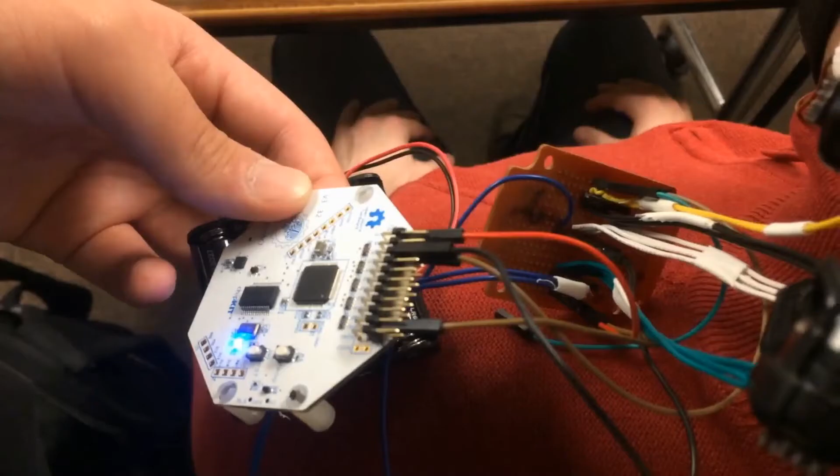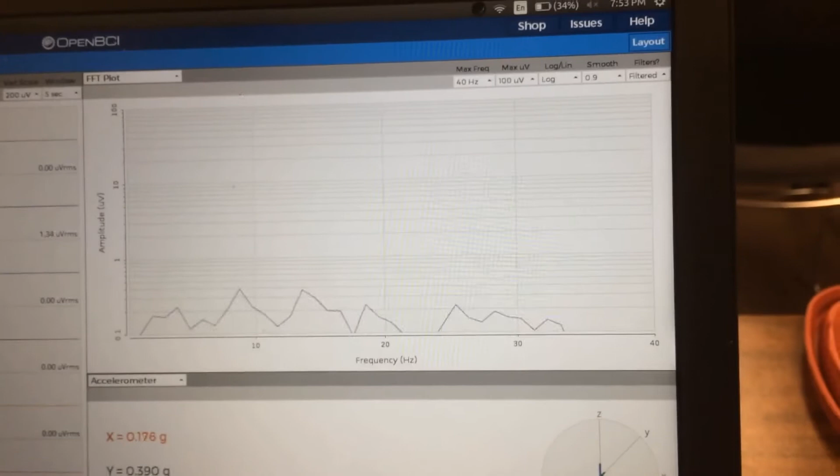Okay, what does this person want to do? And then taking that and then actually making it do that thing. Three, 2, 1, close your eyes. 3, 2, 1, open.

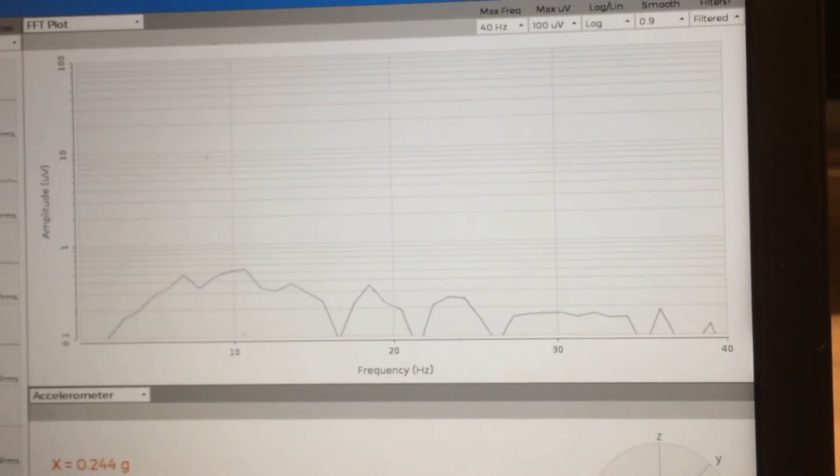Here's a demonstration of the successful controls of the drone.

I got scared, man. I got scared. Up 1300. Alright, keep going. Yep, let's go. Okay. Alright, go then.

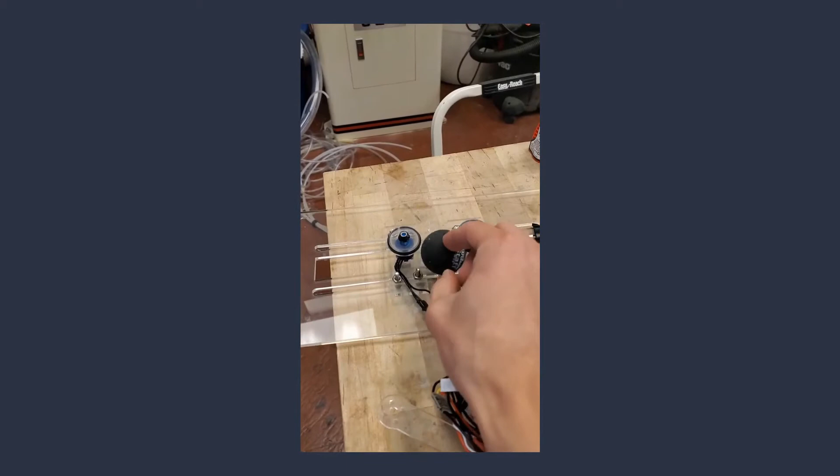Bye, Lily. Here's the throwing mechanism that our team designed. We have built our own EEG headset for the biosignals board, which is also our submission for the fixed portion of the NTX SC20 challenge. Our headset is comfortable for wearers, modular, and easy to use for researchers.

Now, all of these have a tightening mechanism in the back so that you're able to press down as much as the sensor needs to get a more accurate reading, without hurting the user, of course. And you're also able to adjust this to different sized heads so that different people can use it and still get the same level of accuracy.

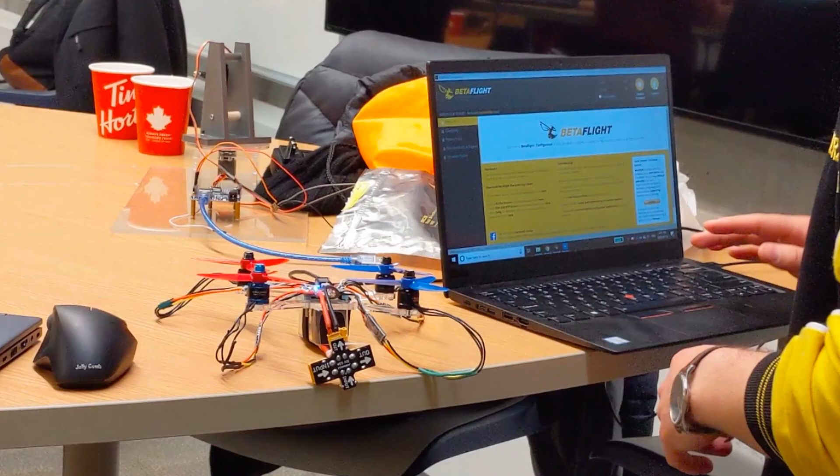In light of the challenges posed by COVID-19, we were unable to finish building. However, we still wanted to demonstrate our technology with an alternative application, which turned out to be successful and also meaningful. So here's how we pivoted. Project Lumos is introducing EEG-controlled turn signals to the biking industry, increasing visibility and reducing risk for cyclists and cars.

Downtown Toronto can have a lot of cyclists, and they need to communicate with the car drivers, which can be difficult in low lighting situations such as dawn and dusk, which are popular times for biking. And the current turn signals on bikes are, guess what, non-existent. So it's up to the rider to indicate what their next movements are, and they have to do so by raising their arms to indicate where they're going to turn. So if the driver fails to see that hand movement, then the consequences can be fatal. According to Canadian statistics, 7,500 cyclists are seriously injured every year from car accidents.

To overcome this problem, Project Lumos is introducing EEG-controlled turn signals, which can broadcast the direction the cyclist would turn with the snap decision of the thought. This will allow the user to have much greater visibility on the road and more control, as you can always have both arms on the bike at all times. Project Lumos will attach bike signals in the form of arrows for clear identification to the rear seat of the bike, which provides a safer and a more alert turn system.

I'm Sonali and this is Jenny, and we're part of the NeurotechUofT team. Here we're demonstrating how a signal of 1 and a signal of 0 representing the thought of left or right, given as a result from our SVM model that's looking at EEG signals, can be sent to an Arduino connected to a circuit and demonstrating the left and right change on some blinkers.